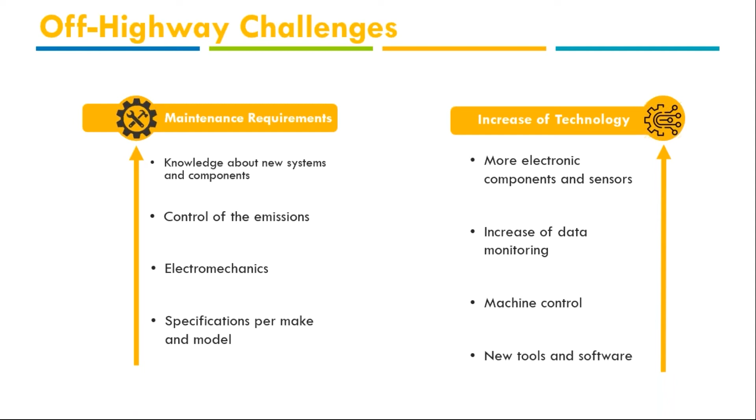Okay, so this environment impacts our fleet in the following way. The maintenance has become more expensive, more complex, with manufacturer specifications, with electromechanics, with less freedom, because we are going to need tools. We are going to need OEM services. We are going to need an extra hand on our repairs and our maintenance. So for fleets and also for off-highway shops, downtimes have increased. Also, we are going to need more parts and components for doing the maintenance and the repairs. We are going to have to take care of the control over the emissions, and we need to be more efficient. Okay, so this environment is a little bit complex.

Okay, many companies that are not being prepared for this new world of doing maintenance and repair of assets, well, they are losing money, losing time, depending on third parties, and at the end of the day, not having the control they need to keep their fleets working.

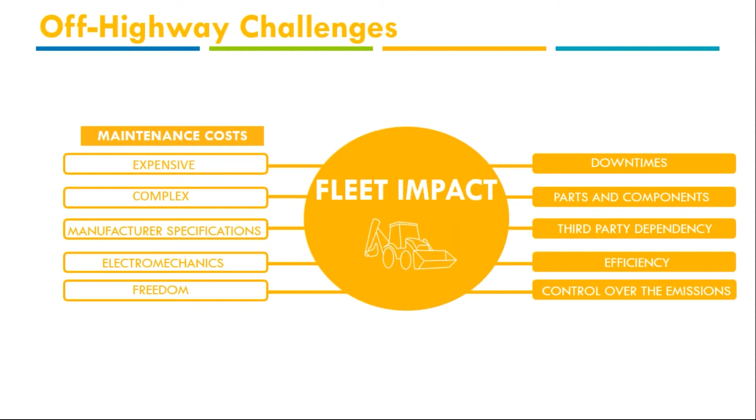Okay, so there are two scenarios in the ways that we are repairing and taking care of our machines. The first one that we are going to see is the reactive maintenance that unfortunately is still one of the most used in the United States. So it's important to do this exercise of education to let the companies know that right now there are solutions and ways to work more efficiently.

Okay, so the cost of owning a single construction vehicle goes from $35,000 to $80,000, excluding the price of the machine itself. In this average price, we are taking care only of four elements of expense: the cost of working and operational expense, for example the workers, the transportation, the parking, the fuel, etc., the maintenance cost as well, and then the spare part cost for these repairs and changes, like filters, belts, replacement, etc.

Okay, so it is important to highlight that in these four expenses, if we put away the cost of working, that is going to be the most expensive one, and we only compare how much a maintenance plan costs and how much spare parts, repairs, service outside of our shop, etc. cost. It's important to highlight that repairs are always more expensive than maintenance. Not just because of the price, but because of the time. When the machine is not working, we are kind of throwing our investment and projects to the garbage.

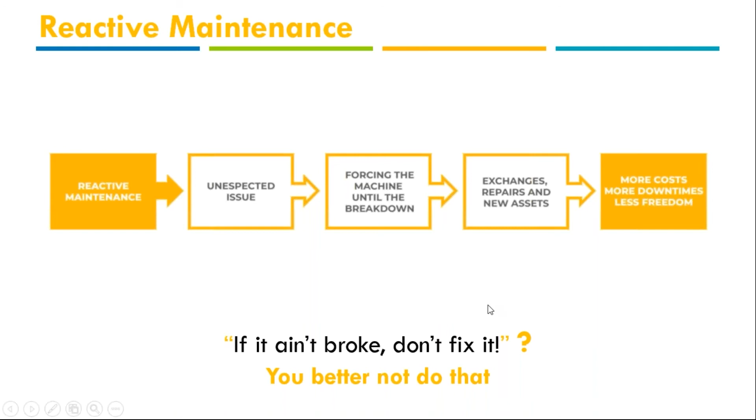Okay, so the second option we have, instead of doing the reactive maintenance, and the alternative we propose, is going to be easy, a planification. Preventive maintenance is that, a planification: the care, servicing, and periodic inspection for the purpose of maintaining equipment in satisfactory operating condition by providing systematic inspection, detection, and correction of deficiencies. Doing a planification, checking our assets daily and weekly, we are going to save a lot of money in spare parts, repairs, etc.

How we can perform this maintenance is easy. We only have to follow the technical specifications that the OEM recommends, that is the maintenance intervals, and we should perform regular diagnostics scans to identify the problems earlier. Every system has specific information, specific things that we have to take care of. For example, we are going to have maintenance intervals for engines, for transmissions, for the aftertreatment, for the attachments, etc. And we are usually going to need a diagnostics tool for every manufacturer, for every system, if we want to take care of all of them.

So it is important to keep in mind that in order to be able to control those ECMs that are sending us that very precious information to carry out the preventive maintenance, we are going to need a tool. We are going to need hardware that can talk with them. Okay, so this is very important.

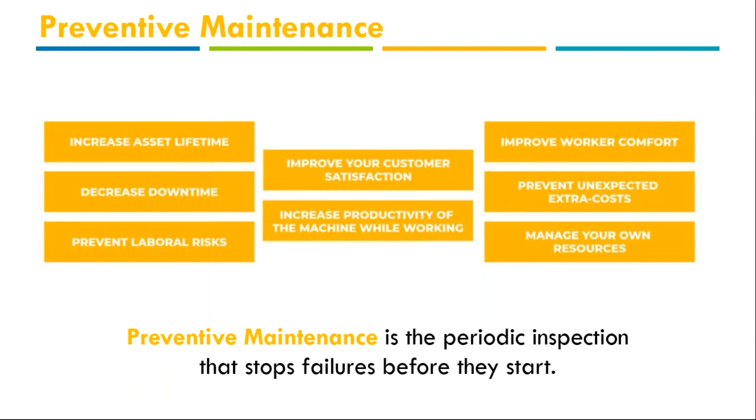So it is important that even if we think that we are saving money because we are not doing maintenance, and I'm not talking only about checking the oil or checking the belts, because this is basic maintenance that almost all companies are taking care of, but I'm talking also about doing diagnostics, about taking care and monitoring the data that the ECMs are displaying to us, and also having access weekly to the maintenance intervals that the manufacturer recommends. If we are not taking care of that, our scenario can become a nightmare, because we are going to have surprises every week. We are going to have downtimes, we are going to have derates because of the aftertreatment, etc.

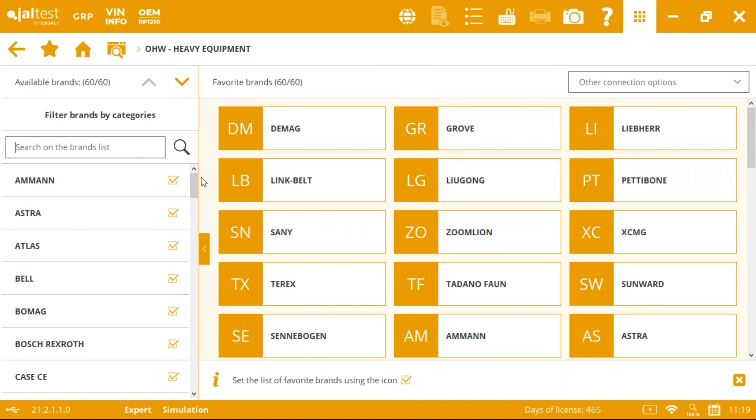So, for example, from the main screen in the software, if we want to go and check the service information for that particular Caterpillar wheel loader, we will click on heavy equipment, and then we're going to go to Caterpillar. So we go here, Caterpillar, and we just need to select the 960 series. All right, and then we go here, maintenance data. Here is where we're going to find all this information.

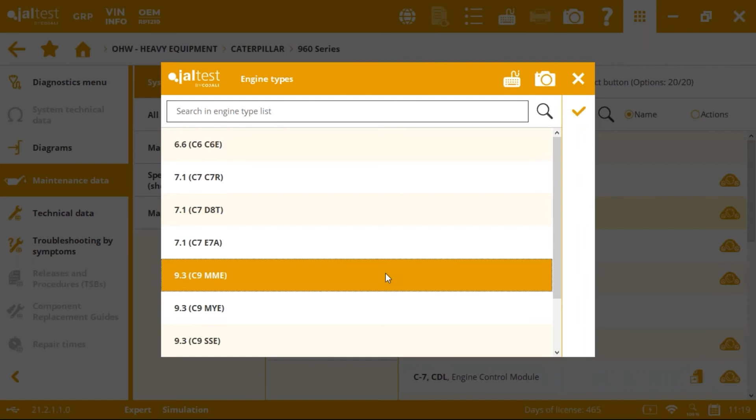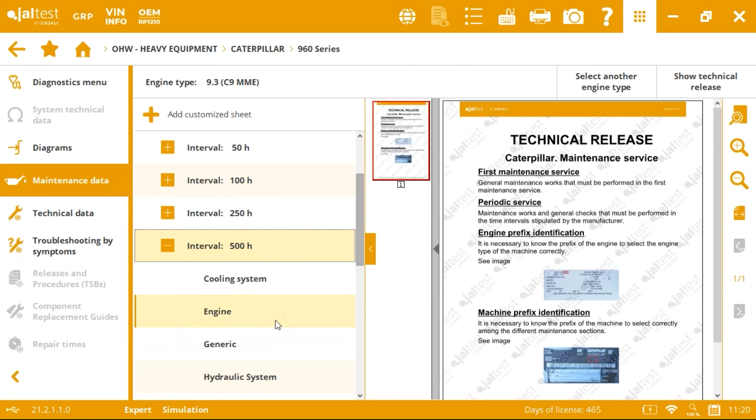Here we just need to pick the engine type that we have. Let's imagine that we have this one, and then we access the information related to the different intervals. So if you remember, we said that this particular machine was at 430 more or less. So as you can see, the next interval is going to be set at 500 hours. If you click here and you want to check what to be done on the engine side, there are different things. But not just in the engine, there are different things related to different systems: hydraulics, transmissions, and so on.

So if we focus on the engine, we can see different things that have to be checked or have to be changed. For example, change of the oil and the oil filter, alternator belts, and so on. So just go here to check what type of information we're going to find. For sure the mechanic is going to look for information about what type of oil they have to use, how much they're going to need, and what is going to be the viscosity.

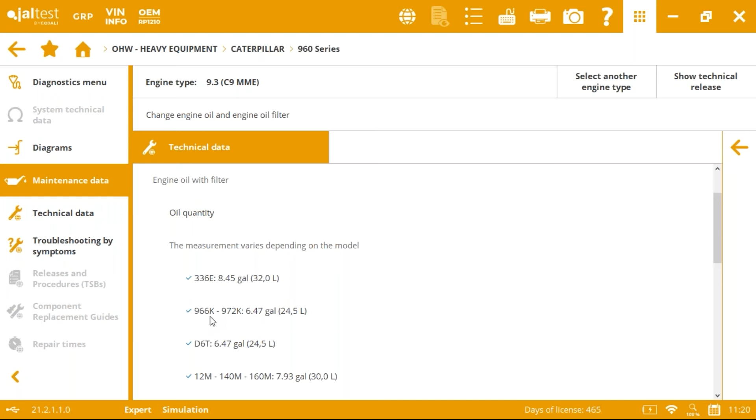So for example, Jaltest in this case is going to provide information about the quantity according to the different models. In this case, we need to take a look here. So we know that we exactly need 6.47 gallons according to the manufacturer, in this case Caterpillar, and also here we have information about the oil viscosity. So there's going to be good information there. All right, so let's get back.

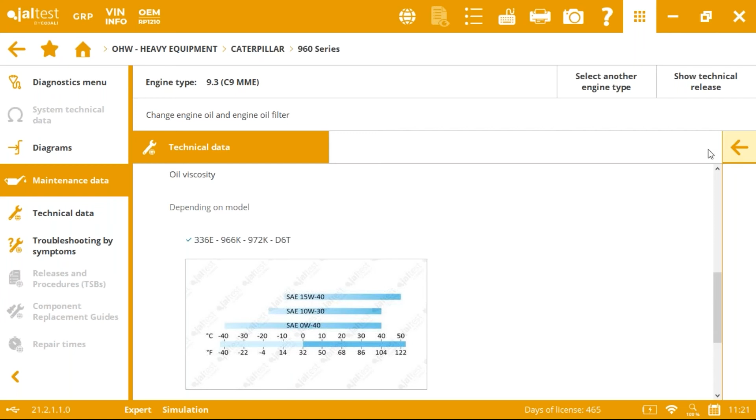So we can see more things that we need to do here. In addition to that, for example, we need to clean the fuel tank filter. We need to change the primary and secondary fuel filters. Also, there are some times that whenever we do this oil maintenance, we need to perform a reset, and for that, sometimes we need to use a diagnostic solution. So that's another reason why these diagnostic solutions are related to preventive maintenance. Okay, so that was just one example.

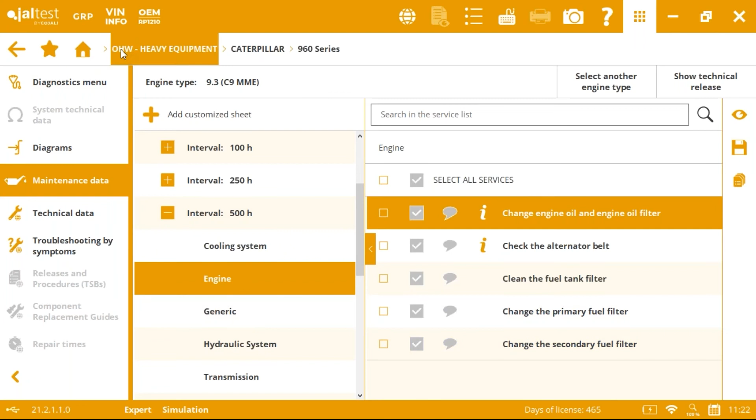Let's imagine now that we are working on a Volvo heavy equipment, in this case another wheel loader that is already at 500 hours of work. By that time, following the recommendations of Volvo, a diesel particulate filter regeneration has to be performed. So if we go here, we can check that. Let's go to Volvo now. As you can see here, we can find all the different brands that are included in off-highway.

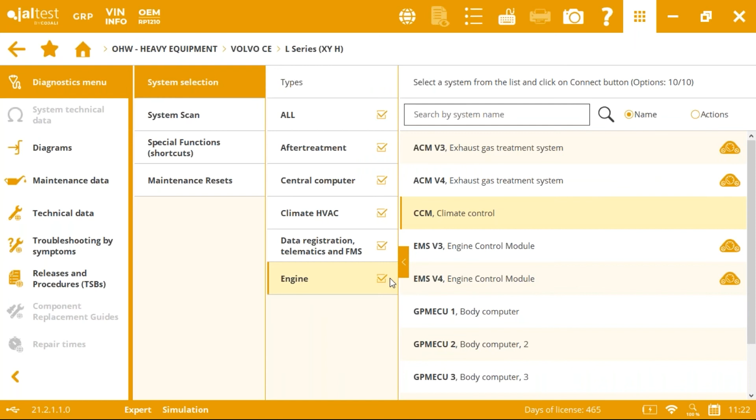So we go to Volvo, and then we go to L series, and then we just pick the one that is related to our model, of course. And then we go here to maintenance data again. Here's where you're always going to find this information. In this screen, we just need to pick our engine configuration, in this case this version of the final Tier 4. And we want to check what to be done at or after 500 hours related to the exhaust gas aftertreatment system.

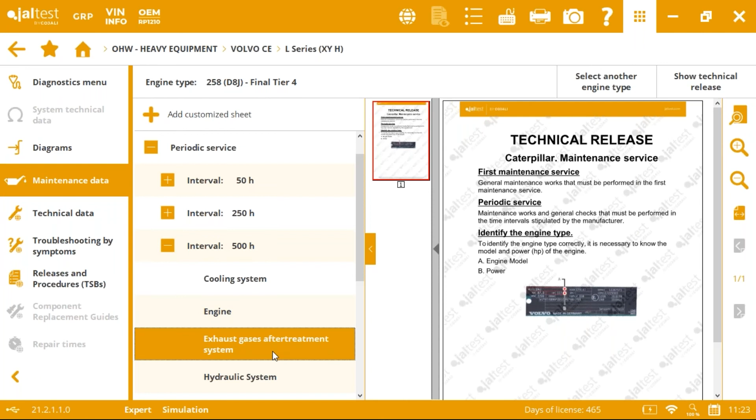So as you can see, at this particular moment, we will need to carry out a diesel particulate filter regeneration. We know that this usually ends by calling a third party that has the capabilities or the technical resources to do that, right? So what about having the resources to do it ourselves, in our shop?

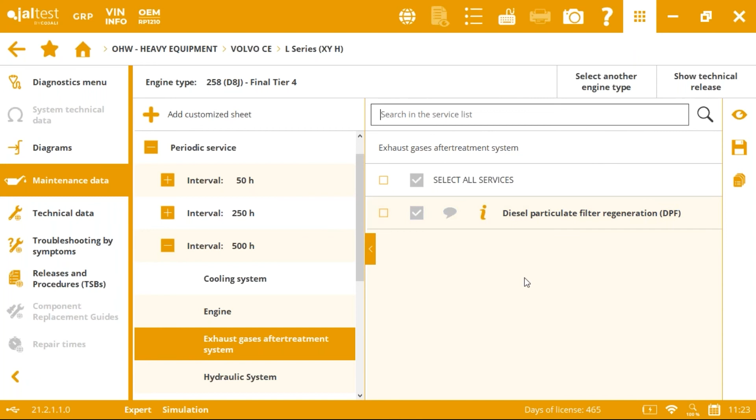And not just that, what about telling us each particular interval with all the information, what to be done in each of these intervals, and of course having access to these particular actions, like in this case the particulate filter regeneration that we can just perform from here, from the software. All right. So I'm going to get back to the presentation.

We're gonna continue here.

Okay, so we have seen just a few examples, like vehicle service data, resets, or DPF regenerations. All of them are directly related to preventive maintenance, and all of them are accessible thanks to diagnostic solutions. We could bring many other examples for which a diagnostic solution can be useful, such as the calibration of the powertrain system, which is extremely recommended when we modify or replace any component of the system, or when we want to avoid malfunctions like noises, vibrations, and so on.

So the goal of this maintenance action of the powertrain calibration is going to be to keep the dozer performing smoothly. Something very important if, for example, we are building roads with the dozer and we need to synchronize both tracks of the dozer in order to keep moving perfectly straight. Other examples, in addition to this powertrain calibration, are the calibration of the hydraulics, the calibration of the attachments, or, for example, the reset of the pressure relief valve.

Okay, so in addition to all these previous examples, the top diagnostic solutions in the market are going to offer technical service bulletins regarding different procedures that are released from time to time by the manufacturers. For example, I remember one related to the rings of the AdBlue or DEF metering module of the SCR treatment system, which is present in some Mercedes-Benz stationary engines. So thanks to this TSB integrated in Jaltest, for example, or in any diagnostic solution, the mechanic or the technician is going to know how to proceed by just following the steps provided by Mercedes-Benz.

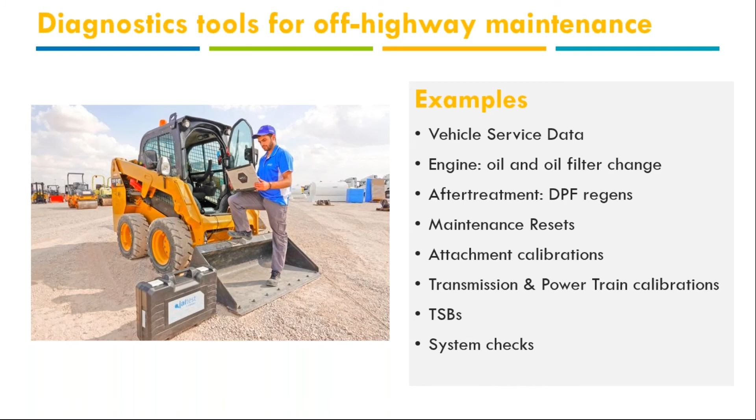Okay, so the good point of having a diagnostic solution is that all this information, all these technical releases or technical bulletins, are updated periodically so that we can make sure that we're always accessing the most up-to-date information from the original manufacturers.

Okay, so we go now to the last part of the presentation, which is going to be predictive maintenance. It seems clear that, at least these days, preventive maintenance is the most generalized strategy in the industry when it comes to ensuring the good health of our equipment and extending its useful life. But what is next? What could we expect for the near future? Well, we all know that the world of maintenance is in permanent change, in constant evolution, improving day by day, and it does it faster than ever before. That is how it is.

It looks like we won't have to wait a long time until a new generation of maintenance becomes mainstream in the repair industry. In fact, we are already fully immersed in what is known as the fourth industrial revolution, also called 4.0 or simply the data revolution. The 4.0 revolution is affecting not just this industry, but also the rest of the industries, and of course heavy equipment is not an exception. This new era is based on three main pillars that you have on the screen. The first one is sensors. The second one, mass data storage. And the third pillar is artificial intelligence.

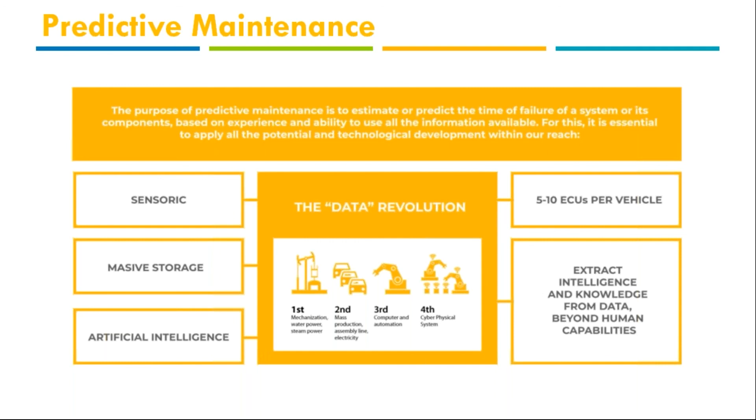Okay, so let's sum up for a second, because I think it's important to understand where the repair industry is coming from, where it is right now and what the future direction is. Jorge already explained it a few minutes ago. So just to sum up, we can agree that at this moment, preventive maintenance is probably the most commonly adopted method among the different strategies or approaches. However, it has not always been like this.

This type of maintenance or strategy is the natural evolution of corrective, also known as reactive, maintenance, whose philosophy is basically run it until it breaks. So we all know how this finishes. The future, and I will say even the present of the repair industry, is necessarily linked to data monitoring and data analysis.

Today's technology allows the gathering of information. Thanks to diagnostics and telematics applications, now we can monitor the health status of the equipment in real time. We can check the performance, and we can even gather mechanical data. We can have access to important data such as fuel consumption, emission levels, engine RPM, speeds, temperatures for the oil, the transmission, the brakes, tire pressures, and much more. Of course, all this can be monitored, but it can also be registered for future analysis.

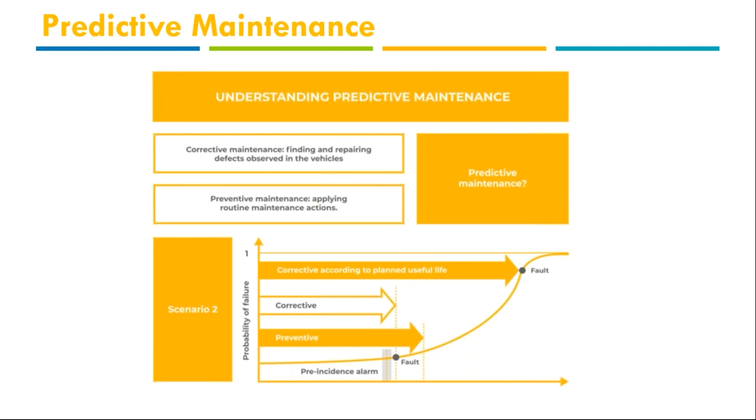What seems clear is that the use of diagnostics and telematics applications is essential in all this process, because thanks to them, we can evaluate the present or predefined conditions of specific pieces of our equipment, and take this useful information into consideration when establishing the maintenance plans of our company. Not only that, the most advanced solutions in the market will allow mechanics to even perform advanced functionalities like DPF regenerations, resets, and many other system checks from a distance.

And that is something that will save companies a lot of money and a lot of time in service and maintenance, or in other words, something that is going to change the approach and allow companies to reach the highest possible levels of efficiency in their activities. So the reality is that the maintenance world is becoming more global and more remote every day.

We're going to finish off the webinar with a recommendation for anyone involved in the repair of off-highway equipment of any kind, and for anyone wanting to be prepared for the present, but also for the future challenges and needs of the repair industry. The recommendation is that having access to a complete diagnostic solution will definitely help fulfill the preventive and predictive maintenance strategies, especially for those of you handling different makes and models in your shop who want to be able to work on all of them.